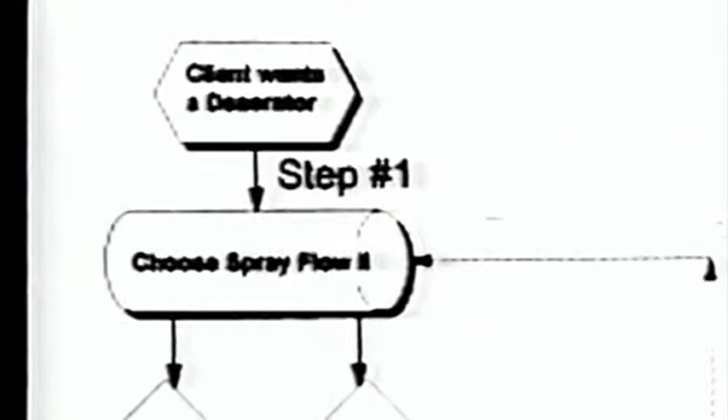The question is, which deaerator? And part of that question is what deaerator can I get him to specify that's going to give me the best opportunity of getting the job? How can I lock it in? We have an internal decision tree that we go through, and we've simplified it to make it easy.

We have 5 deaerators. Again, what's the customer's objective? Right out of the box, we're going to propose a Spray Flow 2 deaerator. Why? It will give the customer, without a doubt, the best value he can get. It'll give him ultimately the lowest cost on an installed and operating basis.

The Spray Flow 2 atmospheric deaerator is a brand new unit, and it operates quite different from any standard atmospheric deaerators that have ever been in operation. The reason for this is the 2 compartments in the deaerator have been divided by a partition, which separates the deaerating section from the atmospheric vent.

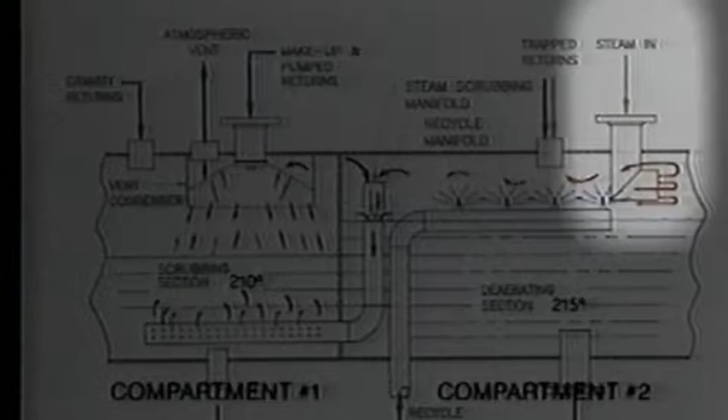The first section, or the mixing section, has the vent on it, and this is where the steam flow control is controlled. What happens here is the water comes into the first section, the temperature controller energizes the steam valve and calls for steam. The steam will bring up the temperature in the first compartment to approximately 210 degrees, at which point oxygen will start to leave the water.

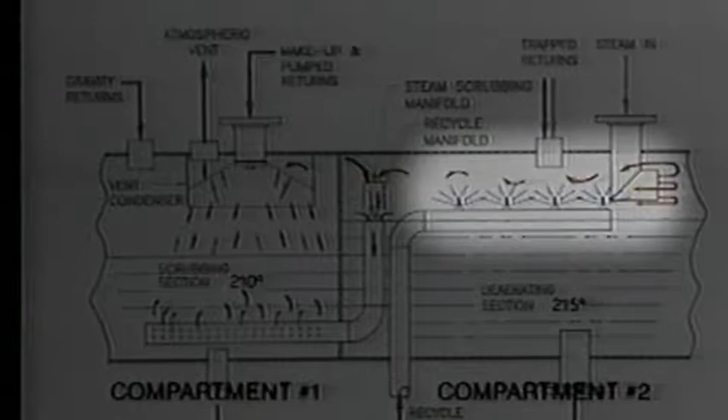This is the first effect of this deaerator. The second effect is the second compartment, or the deaerating compartment. Steam enters the deaerating compartment and flows over the top of the spray nozzles that are spraying water into that compartment, and the balance of the steam is then transferred through the downpipe into the heating and scrubbing section of the first section.

We have a deaerator here that far surpasses any atmospheric deaerator ever manufactured. And they ask, why is this thing so unique? Well, I'll say this again and again: it's unique because it's double effect, and it absolutely controls the water temperature where it must be controlled, and that's in the mixing section, where it brings it up to 210, 211 degrees, which is our first effect of deaeration.

If you drop this down to 208 or 209 degrees, you're not going to get that full first effect. The first effect comes from bringing it up to that point, and then when it goes into the second section, you get up to roughly 215 degrees, and that's your final effect. This is what makes it a good deaerator.

I want to show you how this thing works, because it's really very interesting. This actually turns the deaerating cycle backwards. Most deaerators will deaerate and then scrub - they deaerate initially and then they scrub it. This does it the other way around: it scrubs first and deaerates second.

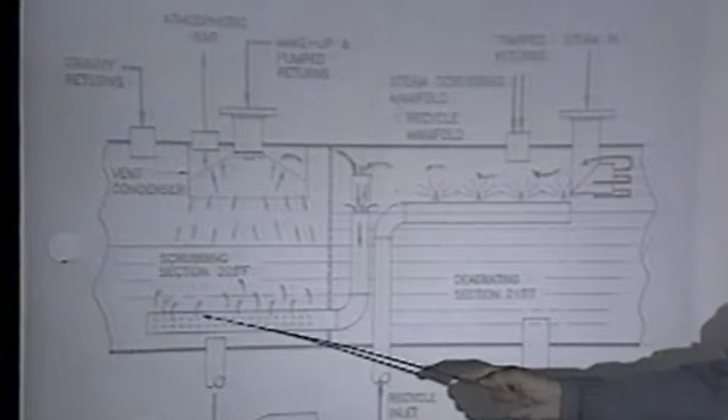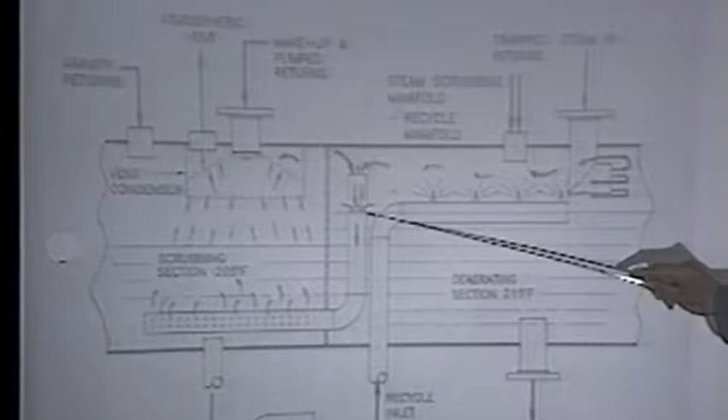Those of you who were at the plant today saw the inside, saw the scrubbing section, which included - it was not a perforated tube, it was a slotted tube, but pretty much the same idea. In one of them, there were 2 manifolds side by side, one higher than the other - one is for water and one is for steam. The steam one, of course, is higher than the water one.

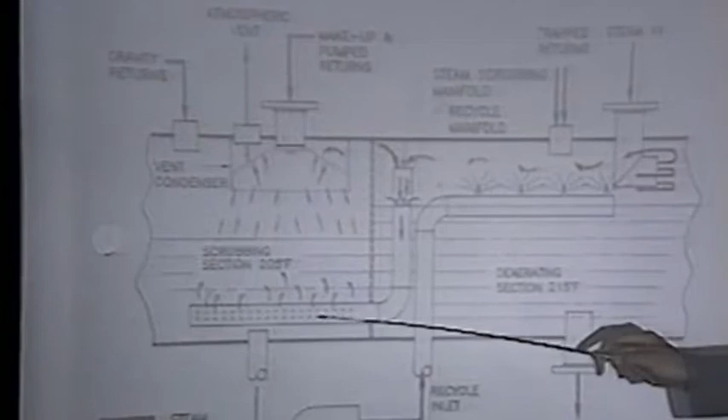The water recycles through here into the bottom of this receiver. The steam is taken through into the same chamber through a separate parallel pipe, and it mixes right here. What really happens is that this steam is controlled from this end. And that's the secret - the steam going in here is controlled from over here.

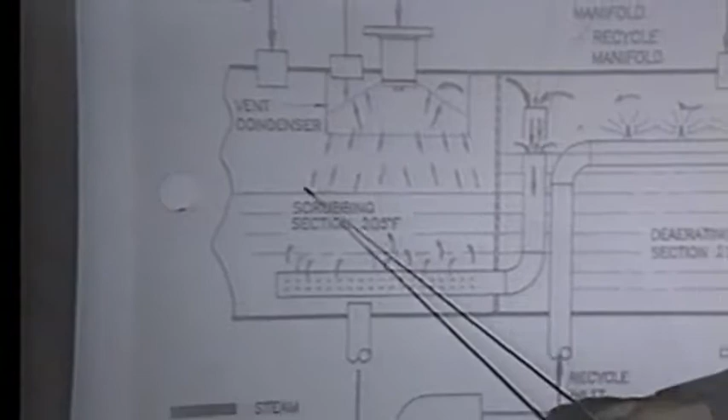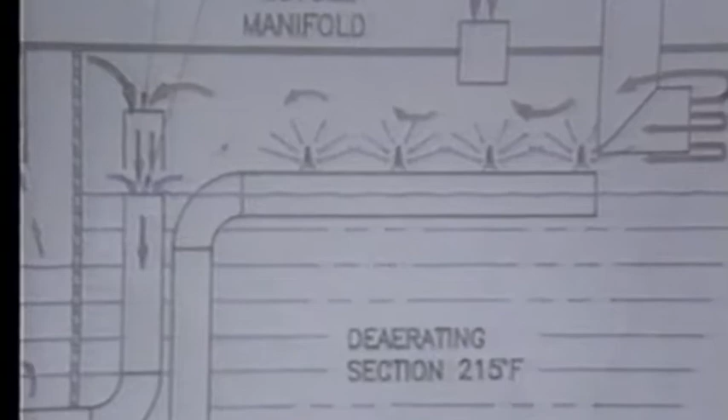The new water, which is sprayed in here, very much like any of our deaerators, into a stainless steel vent condenser and falls into the scrubbing section, which we hold at about 205 to 208 degrees. Why? No flash loss. Secondly, when it's transmitted over here and sprayed through these little pigtail nozzles that you saw at the plant, and I passed around yesterday, the water is 208 degrees. So this doesn't have a lot of heating to do, but boy, does it get the final deaeration done.

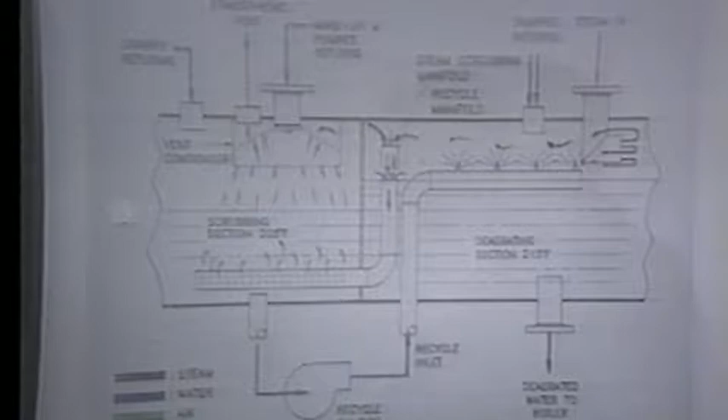Now, there is a slight positive pressure in here. And why? Because you've got a back pressure here of water - you have to take the steam through here and pass it up through this water. It's just like blowing air in through a straw down a glass - there's a back pressure equal to the head of the water. When you have an atmospheric deaerator, you never get pressure decay. Maybe I should explain what pressure decay is.

Pressure decay in a deaerator means that if you're operating at 5 pounds with 227 degree steam and 225 degree water, and the pressure drops in that deaerator for some unknown reason, you get flashing. It's called pressure decay. This affects the feed pumps immediately, because the feed pumps are set up for a given NPSH, which is always lower than the head of the water in the receiver. And if it starts to flash in there, it's going to flash right into the eye of the impeller, and the pumps are going to flash.

So this is a big advantage that atmosphere deaerators have, because it's impossible for them to flash further. It's at atmosphere, it can't go any lower. So they're not going to flash. And this is quite important.

I'll tell you where it becomes important. When you have smaller operations with on and off boiler feed pumps, you many times go way over the capacity of the particular boiler feed pump. We all know that pumps are designed to pump a certain head at a certain RPM and a certain volume. Whenever that volume exceeds what the pump should be doing, you're going to get flashing, particularly if you're pumping boiling water.

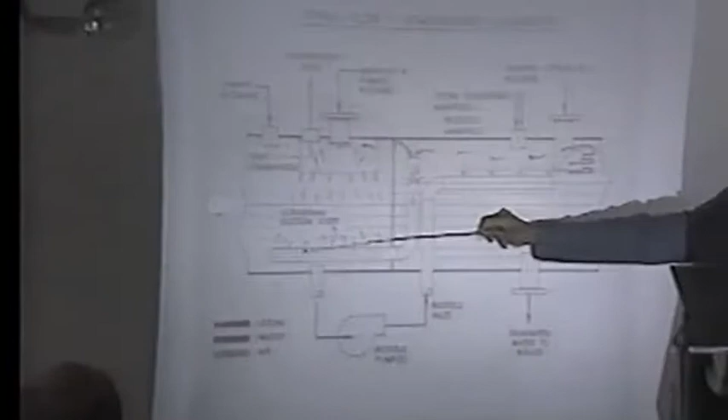What does hot water do? Go up or go down? Goes up, doesn't it? So you have a natural thermal circulation here. This cold water hits here and wants to go to the bottom because it's heavier, and this water wants to go to the top because it's lighter. So you get a thermal circulation within itself. It does a beautiful job maintaining the temperature because you have a steady flow of temperature.

I want to touch on the recycling part of the deaerator. We came up with the recycling on this deaerator about 22, 23 years ago. I'm going to say it was one of the two most important changes in the deaerating field in the last 100 years.

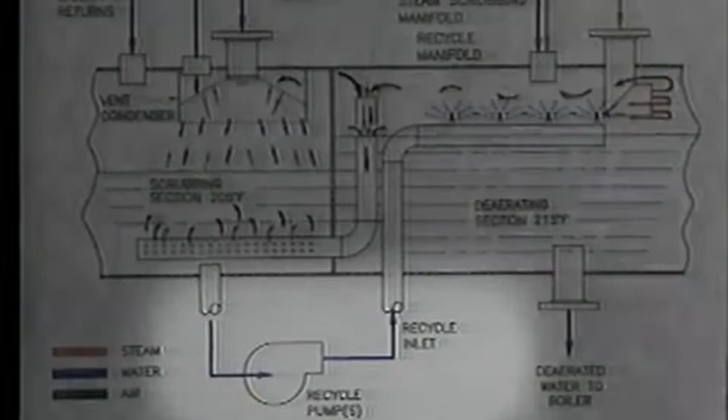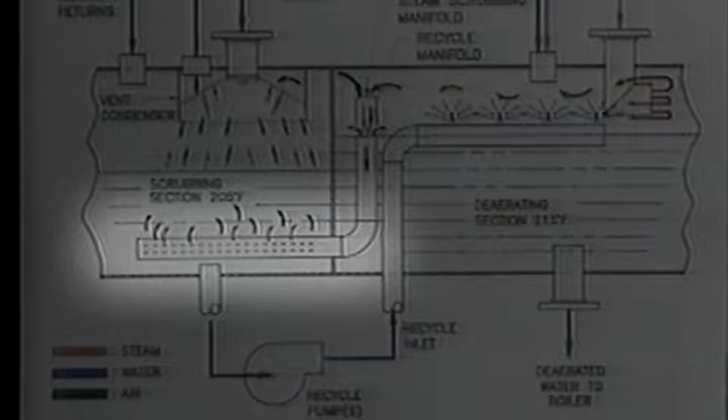If you look at the unit at the scrubbing section, there's a transfer pump on the bottom of this section that pumps the water into the deaerating section where it is sprayed in a real fine spray, and at the same time steam flows across those spray nozzles and does the final deaeration on the water. As the balance of the steam is transferred through the downpipe and through the scrubbing header into the first section, it does the preliminary work.

Normal atmosphere deaerators normally heat this water through a heat exchanger. In other words, pumping from the first section of this deaerator and transferring it through a pump, through a heat exchanger, the water would be brought up to approximately 220 degrees and would be flashed down into the deaerating section.

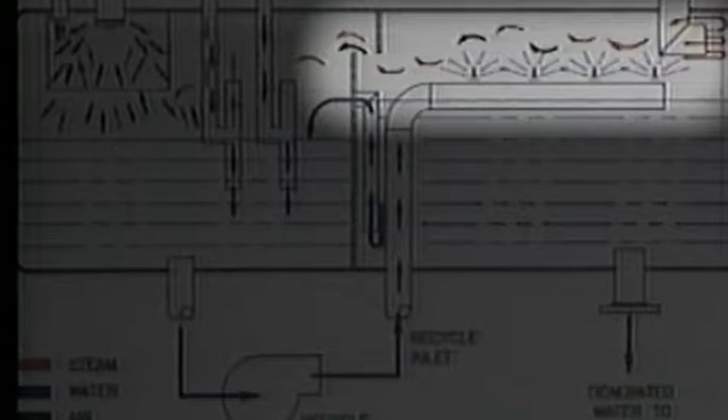As it sprayed into the second section, you would have a certain amount of flash steam. This flash steam would go over. Now you would have a partition in this deaerator, but not completely up. You'd have an open section at the top, and steam would flash into the second section and hope to be used by the spray of the new water coming in.

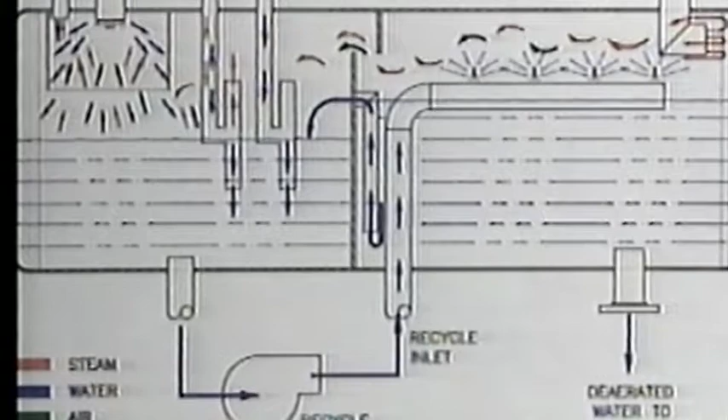Now what happens there, your control is the unit, the steam or the water is controlled coming from the heat exchanger by a temperature control valve, and it has no correlation with the amount of new makeup water being added to the aerator. So at times you can have a lot of flash steam coming out of here, and other times you'd have a negative pressure. The minute you had a negative pressure, the whole top of the aerator, all the steam would just disappear just like that. And first thing you know, both sections are contaminated.

Now, find the separation of a complete baffle in between in here. We have accomplished that this thing is like a pressurized aerator on that side. The only thing is it only has about a half a pound pressure on it. All we want is a positive pressure, and we want that positive pressure at all times. There is no way that air can get into the deaerating section on this unit.

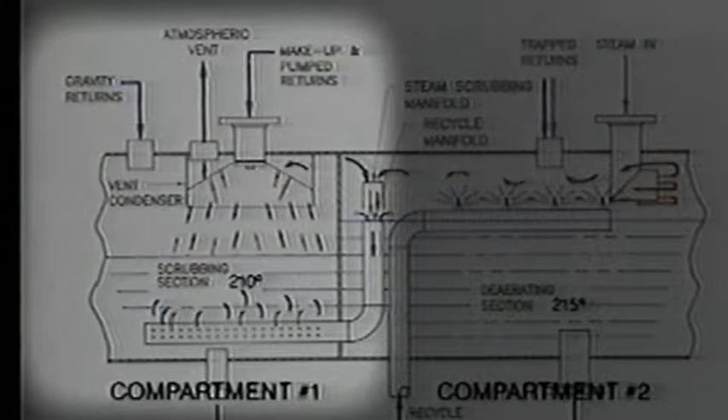In other words, the air can only go up and down in the first section, and this happens at times. In other words, when you're operating a deaerator and they get a surge of cold water in it, you may get a negative pressure in the deaerator, but we only get it in the mixing section. The temperature of the second section, or the deaerating section, will always stay up to a full 212 plus degrees.

The 212 plus degrees comes from the purpose that to get the steam to go into the scrubbing section, you must push the water down, and it's the height of the water in the scrubbing section that gives us the back pressure in the deaerating section. It always has pressure in it because you have water level in the first section, and the steam has to go through the pipeline, through the heating section, and this creates a back pressure which at a temperature of about 212 degrees, keeps an absolute constant because of the level of this water.

And this is what makes that aerator so successful. And in no time can you get air drawn back into that second section. You may get a little air come back in here occasionally because of the transfer of the new makeup water or condensate coming back that gives you a little surge. And if it does, that cool water coming in there will, just like that, kill all the steam in that section. But it'll pick itself right back up again.

Basically, you have no corrosion because I'm keeping that first section up to 210 to 211 degrees, and I'm keeping the other one up to 212 plus. And all our oxygen removal is taken right at the body of the water, so you don't have corrosion. This is the biggest problem you have with all.

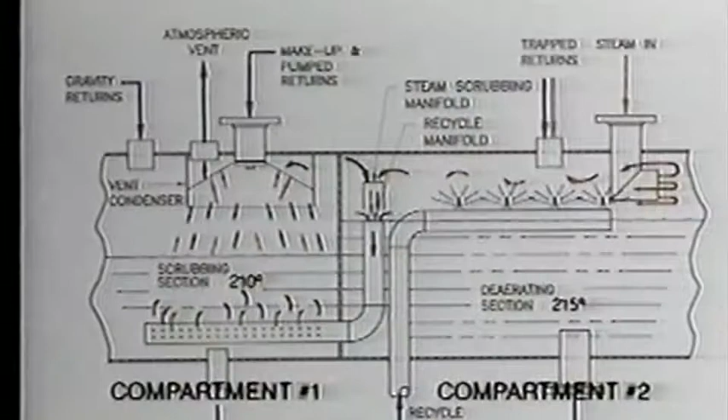So what happens is you get a tremendous amount of steam going across these spray nozzles, and then that steam has to go into the down pipe and get into the second section and bring it up to temperature. The second section has the temperature controller in there, and we set that right at about 215, and it just sits there and floats.

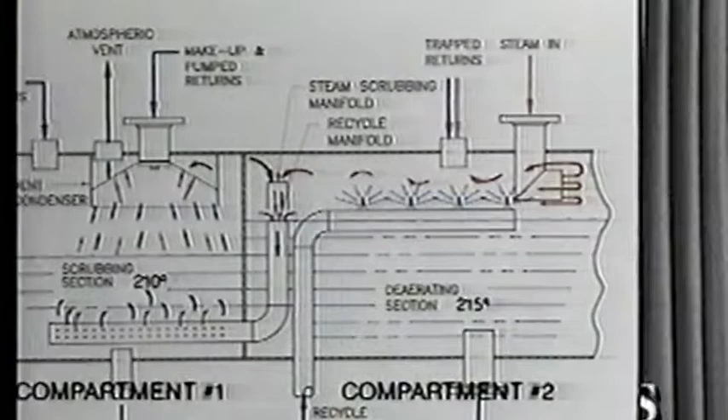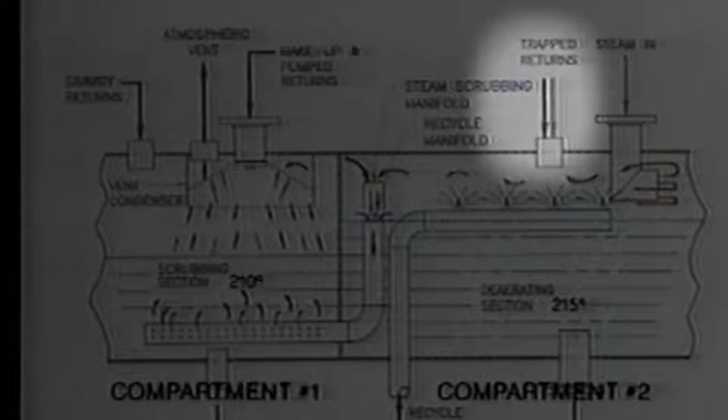First, it pumps the condensate back at a lower temperature and mixes this condensate with the new makeup water into the first section of this deaerator. It can take in 250 degree condensate, but the flash steam goes into the second section as well as the condensate. The flash steam goes over the top of the spray nozzles and then must transfer into the mixing section. The condensate itself drops right into the second section because it's fully deaerated condensate.

Now, this is the advantage of this SprayFlow 2 deaerator, because it's completely sealed and separate, that we can do this. Otherwise, if you had an opening, the steam would fly right out of the top of that second section. Since it's sealed off, you can't do it.

And if this condensate is over 212 degrees, it enters the deaerating section, and there it will flash down to the corresponding pressure we have in that deaerator, which is about 212.5 to 213 degrees. That means that this steam, if we put it in the first section, would flash off. But this way, that flash steam is used just like new steam, and goes through the down pipe into the heating section and heats the first section.

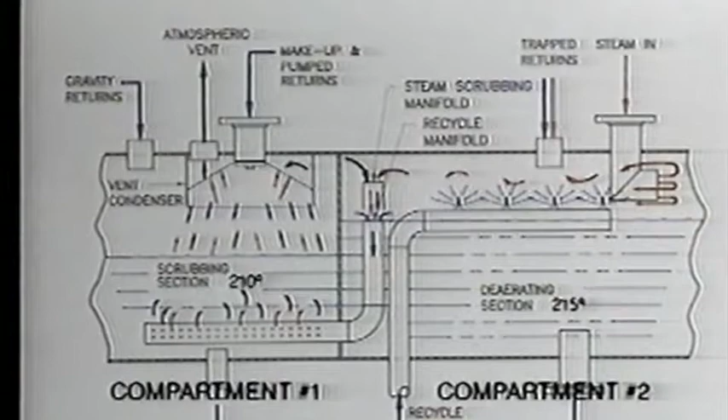So you can have a continuous flash steam coming into that unit from traps and other process equipment, and it will heat the water in the first section, but first it must cycle through the second section.

The construction of the atmosphere SprayFlow 2 deaerator is built in the same manner as a pressurized deaerator. In other words, the material thickness is the same. The welding is as thorough as it is in the pressurized deaerator, done through the same procedures. But it isn't — it's an atmosphere deaerator. It does not require inspection, it does not require code, and it can't blow up because it vents to the atmosphere.

Now, there are times when a SprayFlow 2 is not appropriate for the application — good product, wrong application. Probably the one you'll run into more than anything else is that the customer has a mindset for a pressurized deaerator. That's something that sometimes you are effective in being able to turn around, because in many cases there will be no technical reason to stay with a pressurized deaerator, but the customer's mindset is 'hey, pressurized,' and you're really swimming upstream if you continue to do that.

The other constraint, the other reason that will make you go away from a SprayFlow 2 deaerator to a steam flow, is if the average feed water temperature is greater than 200 degrees Fahrenheit.

The industrial steam flow deaerator has been manufactured for better than 24 years. The unit was an exceptional unit at the time that we started with it because of the recycling part of the system. What we have here is a unit that recycles.

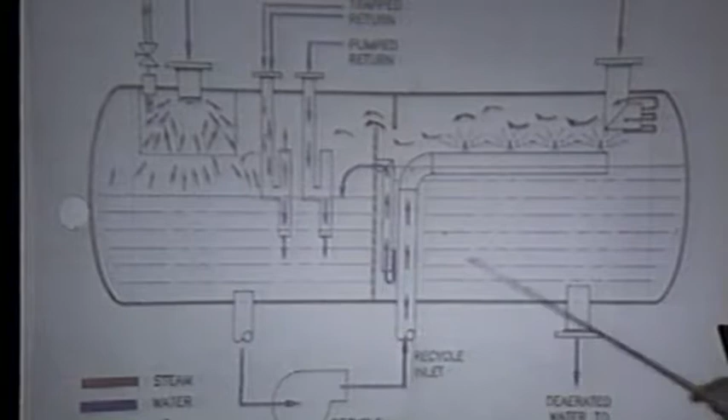I call it a recycling deaerator, with a recycle pump. It doesn't recirculate — recirculate would be within its own vessel. And transfer, you just transfer over and it's gone, it never comes back. This recycles. What this recycle pump does is it's designed to pump 125 to 130-some percent of the output.

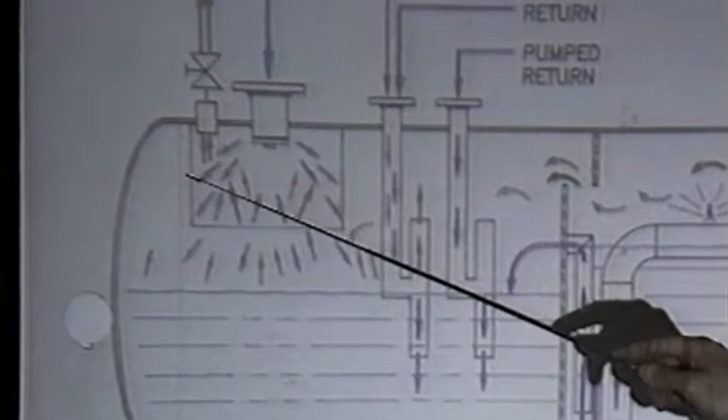So the water falls in here through the steam phase, adding steam here, sensing the steam pressure — again, very much like the jet spray, except you notice that it goes in against a stainless steel vent condenser. The gases have to go through the thing to get outside to vent.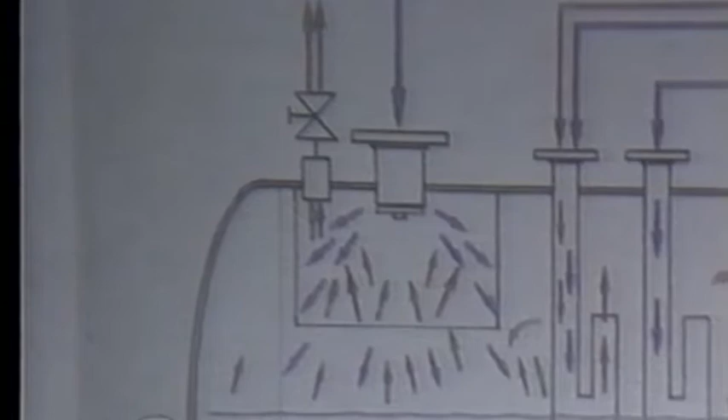Again, air and steam — the green is the air, the red is steam. As the water is sprayed in here, it draws steam. Pure steam, purest water. These are neat little nozzles — they throw a full cone, 120-degree spray. It completely fills this thing with a fog of fine particulate water.

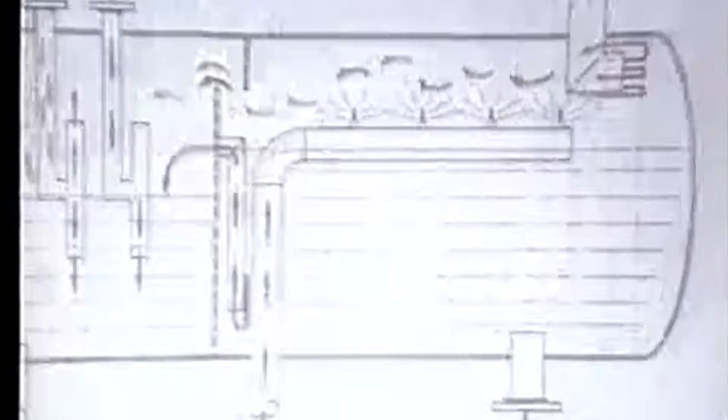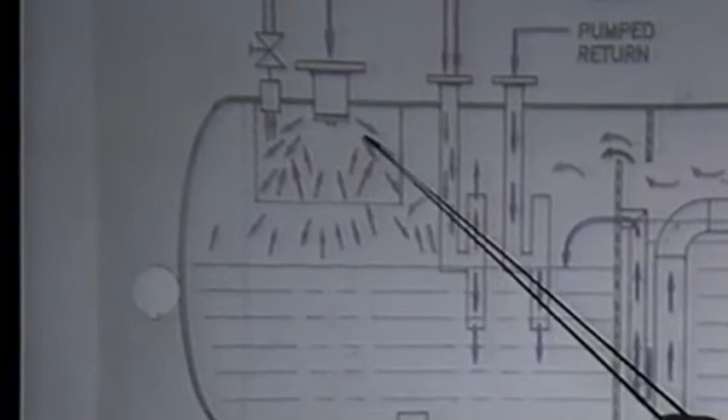You can imagine the thin film and the turbulence all taking place in this part here for final deaeration. This steam goes over here, scrubs the last traces of oxygen out of it, brings some of that oxygen across here, and goes over here and gets out here, and the oxygen goes out through the vent.

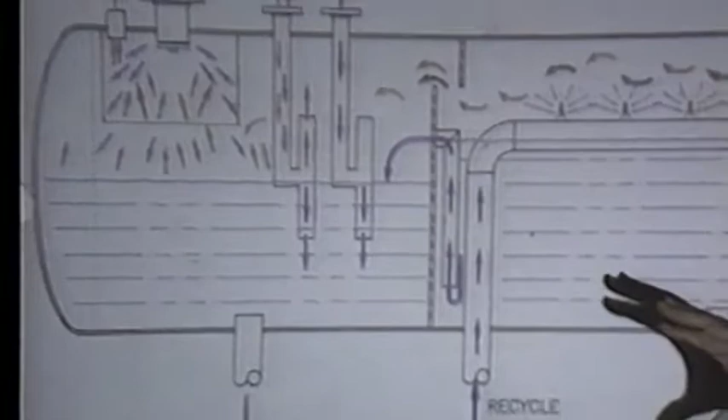The water falls down here. It's modulated from this level here. No level control needed because it overflows. You don't need it, you don't transfer with this. It recycles back - you only need one right here. Hold the level about halfway. This runs about 2/3 full.

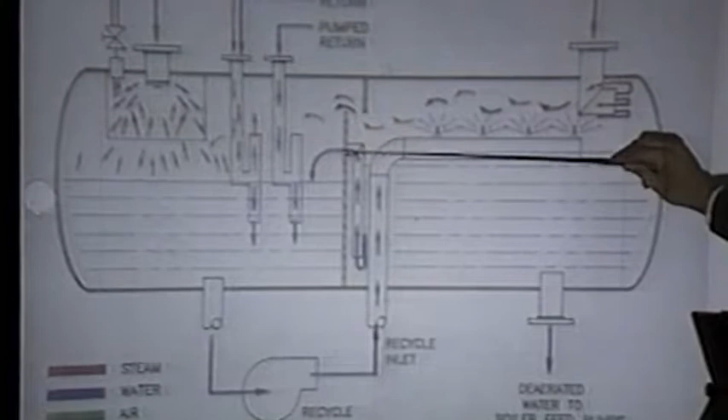As this pump runs, this level stays higher, and some of the water goes this way. At zero load, nothing coming out of here, 100% of it goes over. All of it - at 100% load, only 25% is recycled. So obviously, at loads between 0 and 100%, you get less and more of the recycle.

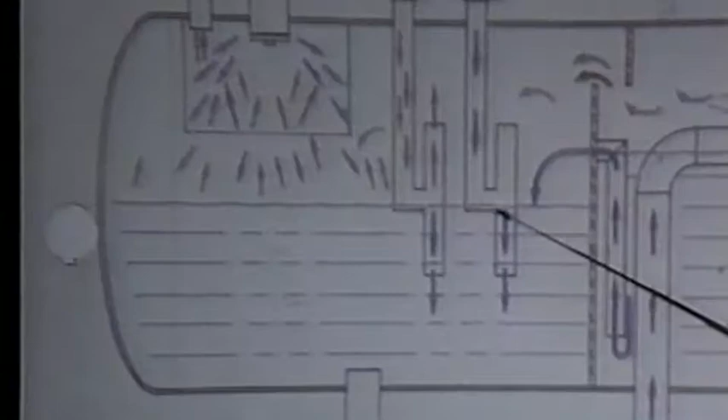This recycled deaerated water mixes intimately with pumped returns, which goes through what we call an anti-flash manifold, because when you trap high pressure stuff back to this, it automatically separates the steam from the water noiselessly, without causing a flashing. See, what happens here is the change in this temperature - seeing this is a big body

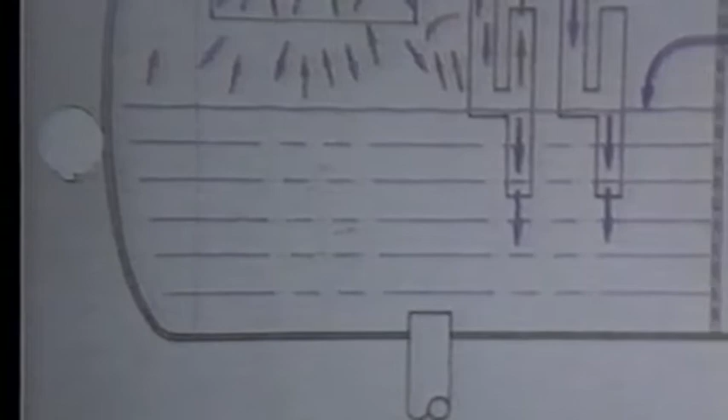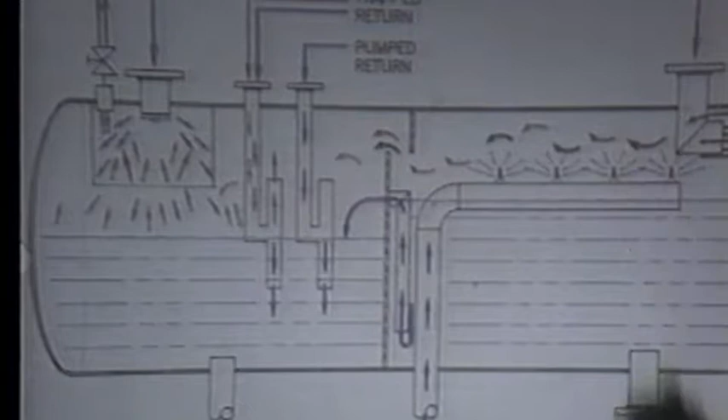of water, nearly the same temperature, even if you take a lot of pump stuff to it, you don't shock the system. Maybe you drop from 220 degrees down to 215 degrees if you took a big slug over. Big deal, this will never notice that. But if it went from 220 down to 60 degrees like that, you'd never keep up. This valve would drive you nuts.

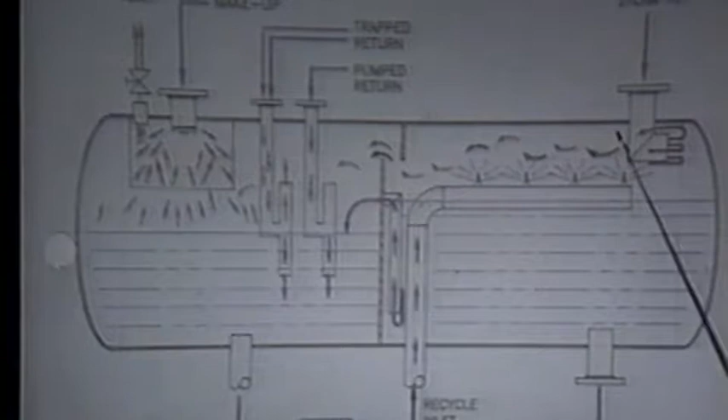So the idea is this stable operation. This only sees one flow rate, doesn't see a varying flow rate. It may see a slightly changing temperature, very slow, but it only sees one flow rate. It sees 125% of what could go out of here at maximum flow rate.

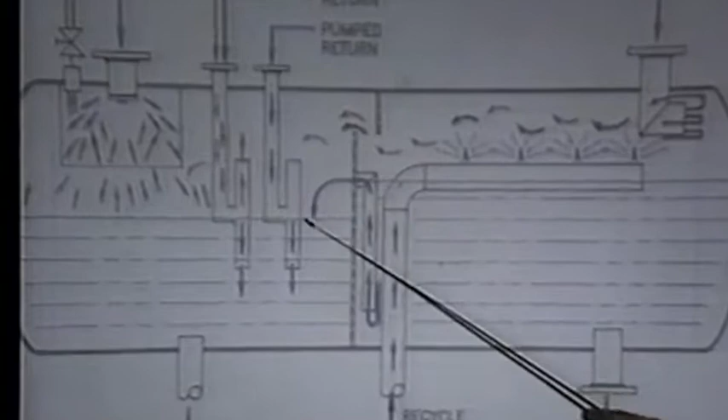Again, the water goes here, flows up through here, over it flows into here, mixes with the pump returns, mixes with the trap returns. The steam is utilized here preferentially from the trap stuff into here for heating. This valve here, which we don't show, adds steam as required. This unit here will utilize a lot of high pressure trap stuff.

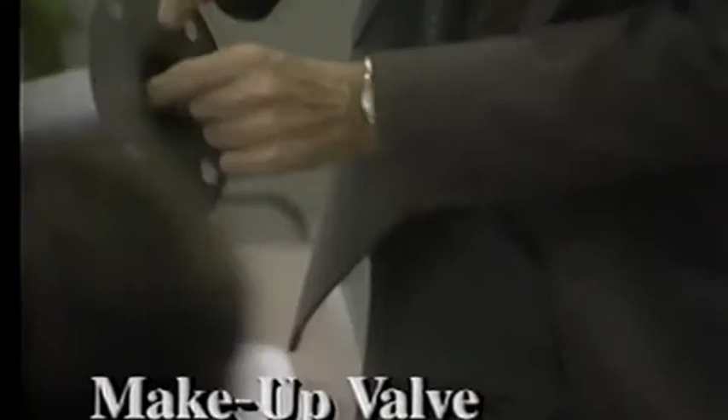The locking nuts that we talked about adjusting it are right here. You screw them down further, the valve will open up only this far or less. Normally, there's no need to do that - in fact, we've only done that once or twice.

Will those loosen up? Yeah, they're double nutted. They're double nutted, so that's it.

It fits between two flanges - flange here, gasket, flange here, gasket. Sometimes we use a T. If we have 100% makeup, we'll just use an elbow because you only get the makeup in here. You get pump returns this way and makeup this way. We usually put the T up here - take the pump returns this way, water in this way, out here, depending on the flow.

Now it takes quite a bit of pressure to open it, but you can imagine there's 3 or 4 square inches, so 1 pound is 3 pounds of force. It's really not that bad.

These are the little constantly recirculating ones, look like pigtails. Cute, aren't they? Do a beautiful job.

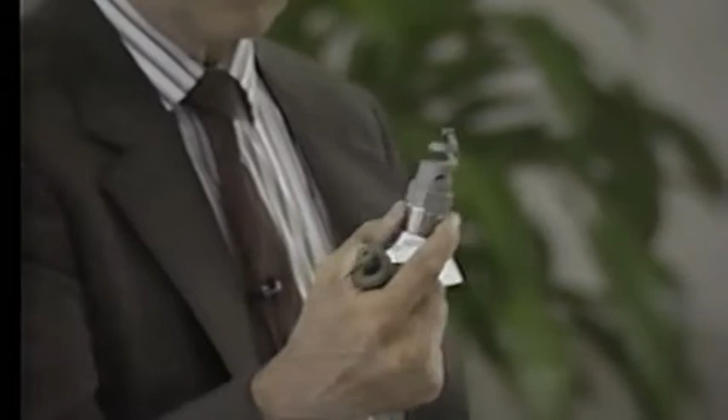This is a 3/4, this is a 1/2 inch. They go down to 1/4 and 3/8. And I want these back because they belong to a job, but I'll pass these around too.

This is the nozzle we use for recycle. These are metered to a point where they're almost dead accurate. In other words, our recycle pump pressure is around 25 pounds, and we know at 25 pounds exactly how much one of these will pass. We've tested them, and they're right on.

So we know that if we put, say this is good - these could be good for maybe 50 gallons a minute, actually. So if you had a recycle rate of 200 gallons a minute required, you put 4 of those in, you got 200 gallons a minute.

Let's suppose you have a replacement deaerator application, and there's an existing surge tank. Okay, now you don't need that dual section that you get in the spray flow. So why pay additional money? Why should the customer pay additional money for the spray flow if he already has a surge tank? If he has a surge tank there, then it's appropriate to quote a jet spray. If the spray flow deaerator is basically out of his budget, that's another reason for going in with a jet spray.

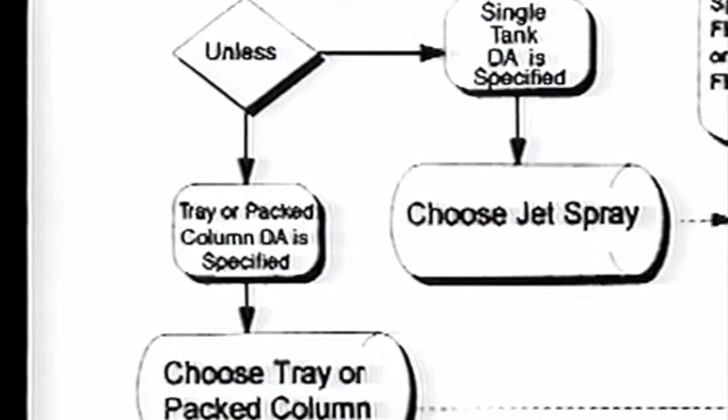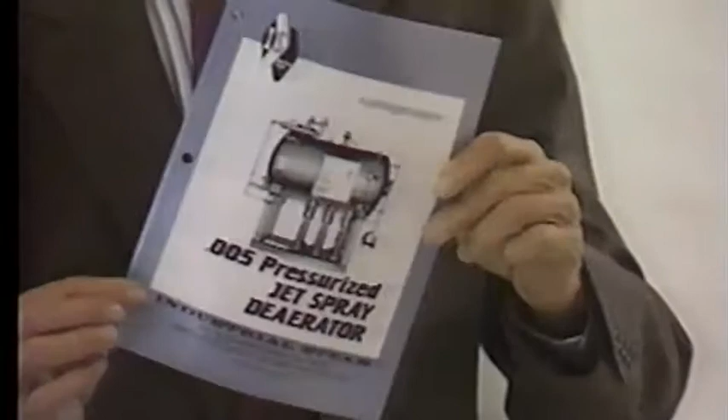We're going to talk about pressurized deaerators. This is kind of our bread and butter deaerator, the one that competes with all your people like Cleaver Brooks, BFS, York Shipley, etc. It's called a jet spray deaerator. Now, for those of you that don't know how a jet spray works, I think we need to talk about it a lot, and I'll tell you why - because it has some disadvantages too, and I need you to listen to that.

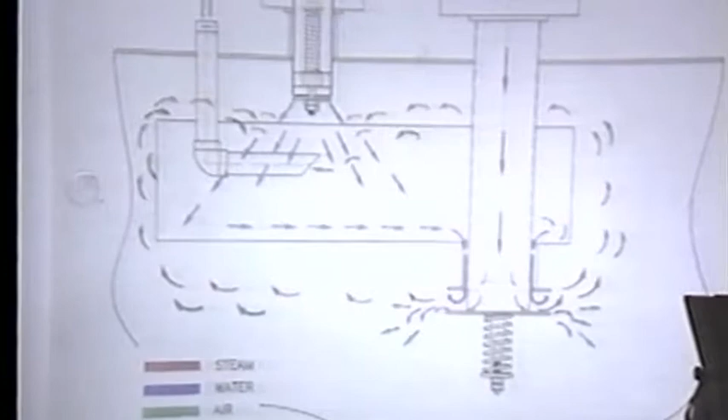We preach on them, we talk about them in our newsletter, I talk about them on all our things, we even put it on our drawings: pump returns only, no trap returns. We still get people putting trap returns in the pump return opening, and you cannot do that, but that's another story for a minute. Anyway, what we do is take up pumped returns.

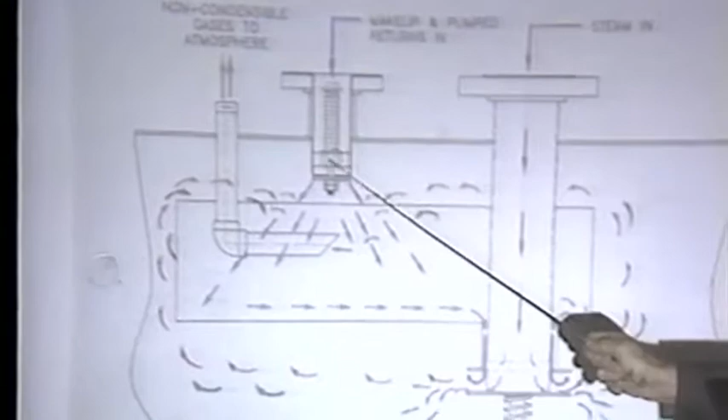See this word, pumped returns? In here, they're pumped in through a nozzle that has an adjustable orifice in it. I've got a drawing on it. In fact, maybe I'll show that to you real fast so you'll know what I'm talking about, then I'll go back to this one.

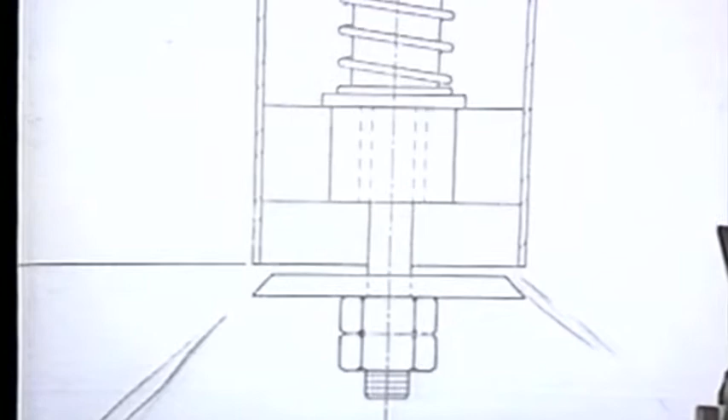Now, if you have a deal where they're pumping too much cold water in here due to a big pump out in the plant there, and they won't shorten the stroke or restrict it, you can do it yourself here by pulling it out and just pinching down this so you don't open it up quite as far, and let the pump work a little longer out in the plant. Because usually your city water has 40 pounds pressure, so you've got plenty of push over there, but it does have what they call an anti-flash feature in it that lets you adjust the opening.

That's our nozzle, and I'll go back to this. Now that is this guy right here. I guess I could have shown it here. Anyway, I got it backwards, sorry.

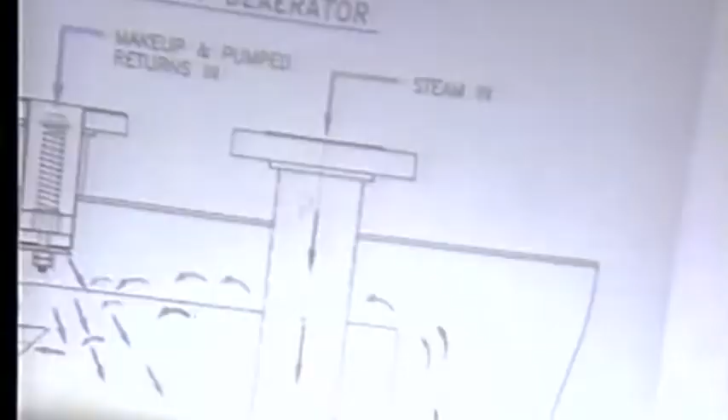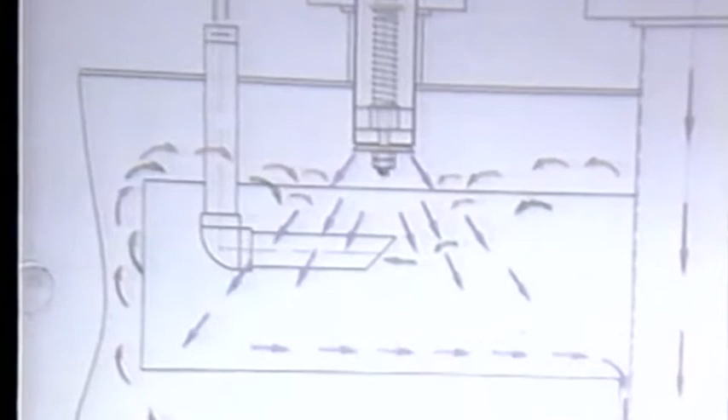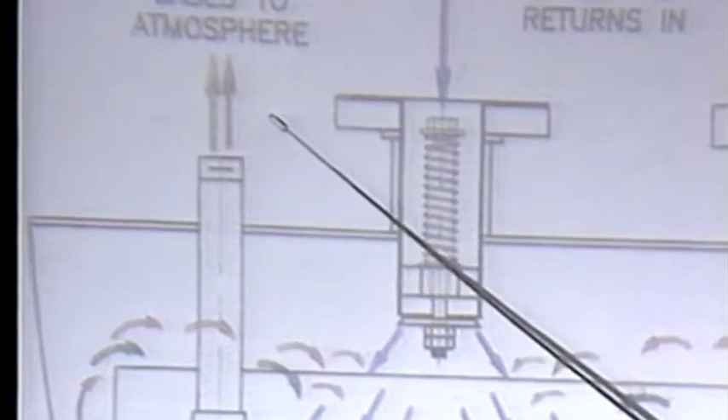You notice this is a hollow cone, so there's no water down the middle, and we put a vent pipe right in the center, and we bleed off gases all the time. The green arrow is your air, your blue or purple - came out kind of purple in this - is your water, and the red is the steam. We have to get rid of some of the steam to get rid of some of the air because it's mixed, and it has to go through here.

Now, since this is cold water, most of your steam is recondensed and formed down here. The air, of course, will not reabsorb, it goes on through. Because this, by the time it gets this far, believe it or not, if you could put an infinite number of thermocouples in that spray, starting from here to the time it hit the tray, you'd find that by the time it got in this area here, it'd be up to almost corresponding temperature. That's how fast steam wants to go into water.

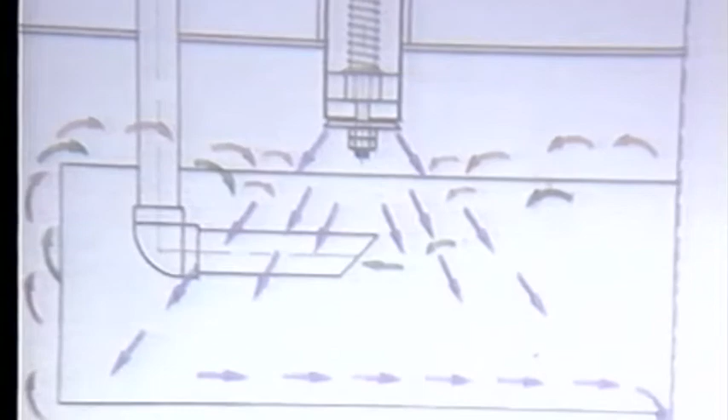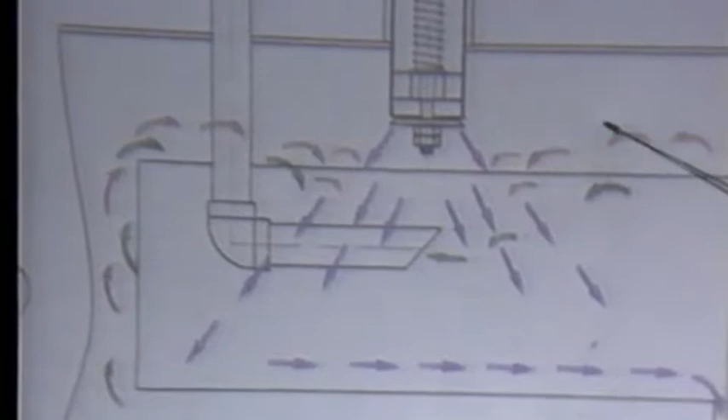It's totally incredible. So cold water has a tremendous attraction for steam, and if you don't believe that, where do you think water hammer comes from? You never get in trouble putting cold water into a steam space like we're doing here, but try to put steam into cold water and you get one hellacious hammer. And that's how you break pipelines and so forth, steam going back into the water.

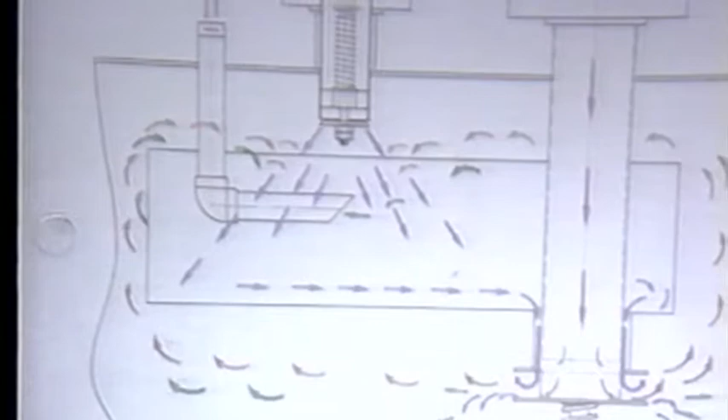So the steam goes through here, grabs into this water, and I'm going to tell you, like I said, infinite number of thermocouples from here to here - you'd see that by the time the water got in this area here, it was probably up to corresponding temperature almost. And by the time it gets down to here, definitely. It has to be, because you only have about 2 seconds, best, to get rid of...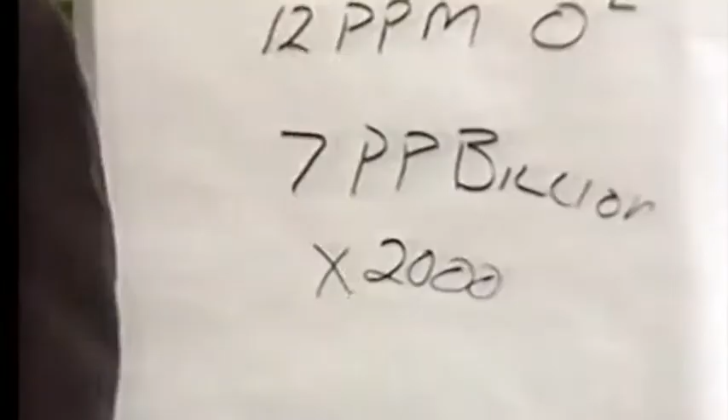2,000 times the oxygen. You're taking it down from 12 to 20 parts per million - they can go as high as 20 parts per million in highly aerated sources - down to 7 parts per billion. Because by the time it hits the water level down here, you can't deaerate anymore. You're through. If it isn't 7 parts per billion there, it will never be 7 parts per billion in this deaerator. Well, so as you can see, the water goes down.

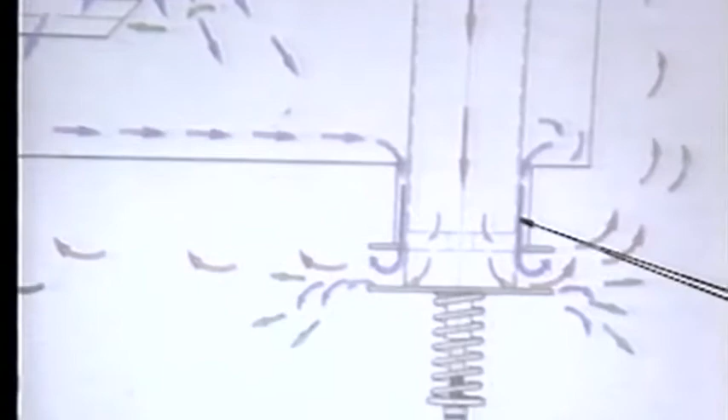There's a catching pan that catches all the water, and it's directed down through a sleeve. This is a stainless pipe going down here, and it hits this - we call it a flapper, steam flapper - and the steam pressure, of course the steam's coming in trying to get over here, so it's open, and it's proportional to how much cold water you're putting in here, because it responds immediately.

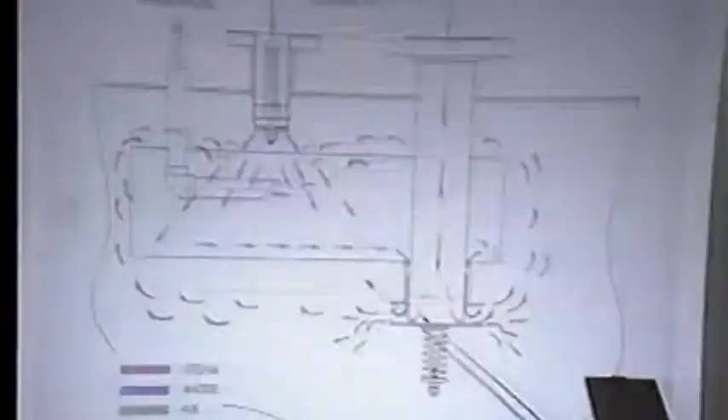Again, I've got to tell you, pumped returned. We do have an opening over here, and it says for high pressure drips. That means what it says.

For maybe 10 to 15% of the returns to be trapped from overhead drips and things like that in the boiler room. It does not mean you can run 50% trapped returns back to this unit. None of these types of deaerators will work with that kind of abuse. They're not designed for it, and you need to be thinking about a different kind of deaerator.

And Mike, you look like you want to say something. What's the quality of the condensate coming back to the deaerator? This condensate pumped? No, the drip. Oh, yeah, a drip. Hopefully it's zero, because it's come from the boiler and it's condensed steam.

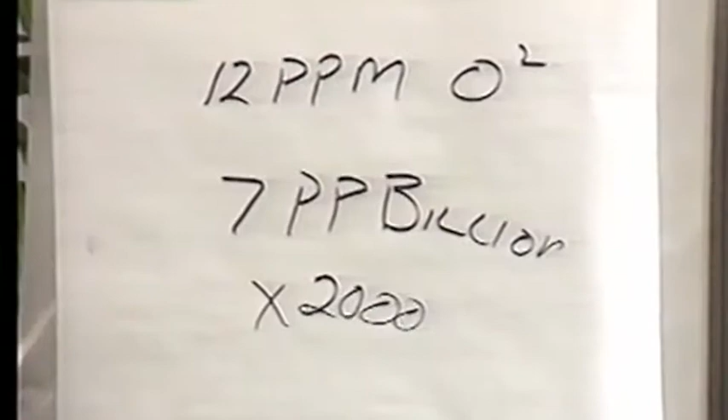And if you're doing a good job here, the trapped returns are usually down to 7 or lower, because what they do in the boiler, they treat the water chemically to reduce it from 7 parts per billion down to 0. In fact, any of you that know anything about water treatment know that sulfite is sometimes added to the deaerator, and we allow sulfite to be added, but we don't like to add phosphates or something like that. They tend to plug the lines, the pumps, and all those sorts of good things, but sulfite's okay if they want to do it there. What they do is take this 7 parts per billion and reduce it to 0, because they hold an overage of sulfite already between 20 and 40 parts per million. So the steam that goes out is literally 0.

So theoretically, if it's kept under pressure and there's no way the oxygen can get to it, like Mike says, it comes back here at 0. So there's no harm done. You do not dilute the quality of this unit by trapping back from the overhead.

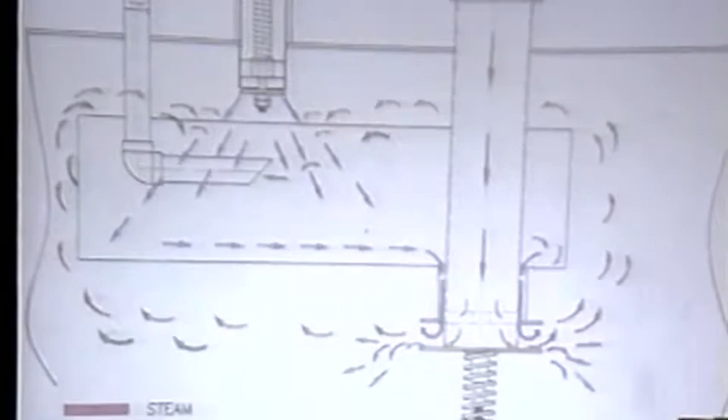But remember, once you get over 10, 15 percent, if you have a high return situation, talk to us. There's ways you can handle it in this kind of deaerator, but it has to be known in advance. It can be done. We have cases where we have flashing returns taking place, but we have to make adjustments for it, we have to fix the nozzle, for instance. We have to do all sorts of things, but it can be done.

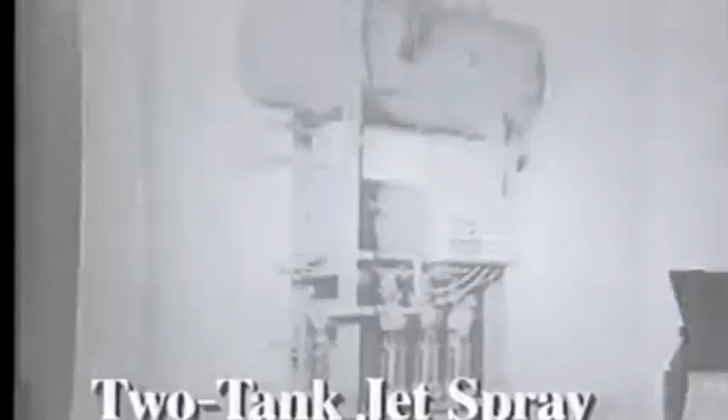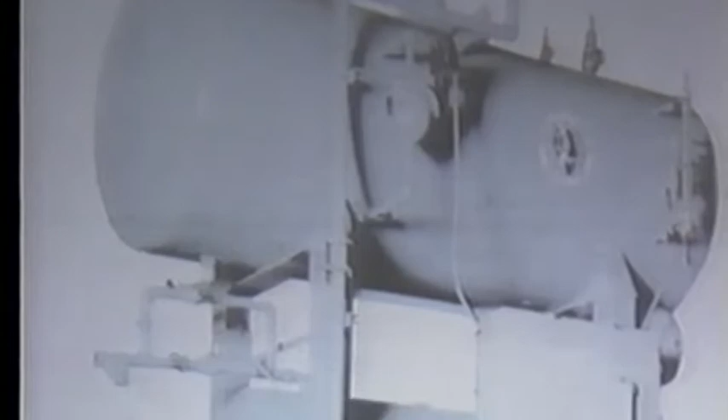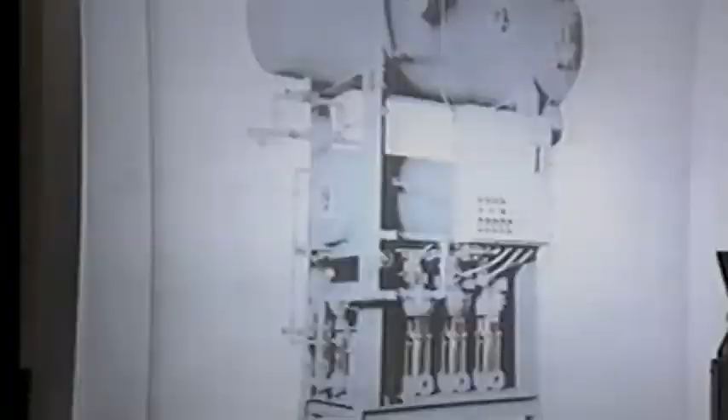Rather do it another way. That's a unit that we sold to Buffalo. It's an overhead, what we call a piggyback, deaerator on top, condensate system on the bottom, with transfer pumps, not recirculating pumps, but transfer, takes from this tank here and transfers up to here. Obviously it wasn't shipped in one piece, but in two pieces and put together on the job. We can build a jet spray vertically in almost any size you want, if they want it vertically. Saves a little room, gets pretty unwieldy when they get pretty tall, but yeah, we build them up to 1,000. In fact, I got a picture I'll show you here in a minute.

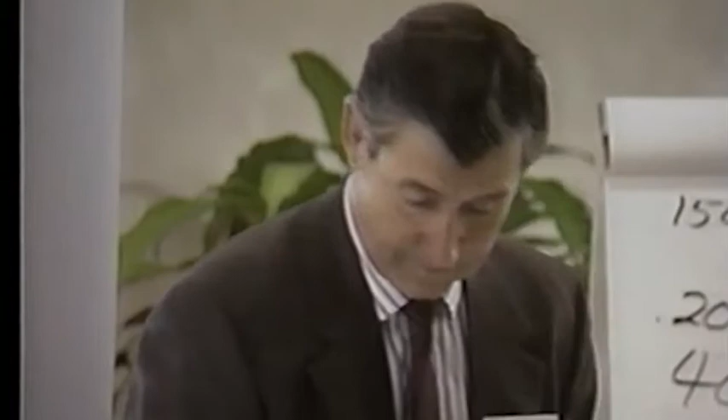And here's one I ran, an overhead on it. One thing we do on this, you got to watch yourself a little bit, because some of the things that are standard on our jet spray are not standard on this. To keep the price down, for instance, the safety 3-valve bypass is an optional item.

Now, the reason we did this was meant to directly compete with Cleaver-Brooks Model 7. And we did the same thing they did, we made them add on the other things, they do too. High water alarm is optional, overflow trap is optional, 3-valve bypass, the control panel is optional.

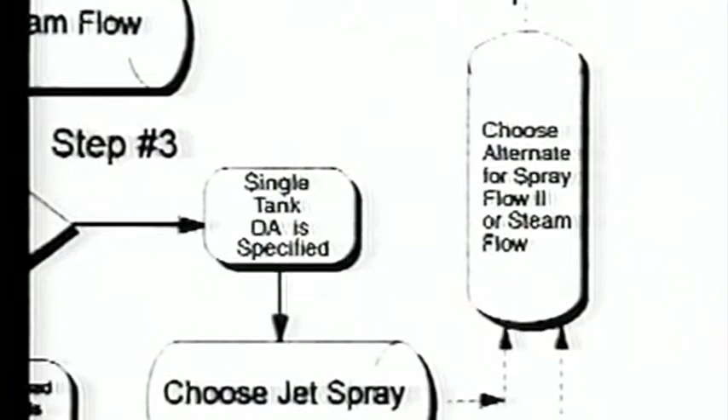And the fourth and last is, unless the customer has a mindset or a specification preference for a tray type or pack type deaerator, and if he does, go ahead and quote it. Keep in mind that you can still quote a steam flow as an alternate, and price-wise, it's going to look real good to him. The tray and pack column deaerators round out Industrial Steam's line of pressurized deaerators.

And what we want to do is talk about some of the significant differences between our deaerators and the competition. Some of the most significant differences between our line of tray and pack deaerators and the competition is configuration and materials of construction. Cochrane and a couple of the other competitors utilize a co-current downflow configuration for their tray type units. Industrial Steam and some other companies operate countercurrent, or counterflow, with the water coming in the top of the deaerating section and steam in the bottom of the deaerating section. We've elected to go with the countercurrent flow because it's a more effective and more efficient way of deaeration.

And furthermore, Cochrane, among others, have had a significant amount of problems with the deaerating section failing after 5 to 10 years of operation.

One of the reasons why those units fail is because in a co-current flow situation, they have continuous absorption and desorption of air, and they set up an internal recycle of air, and that results in high oxygen concentration and corrosion of that tray section. We're countercurrent flow, and that simply doesn't happen.